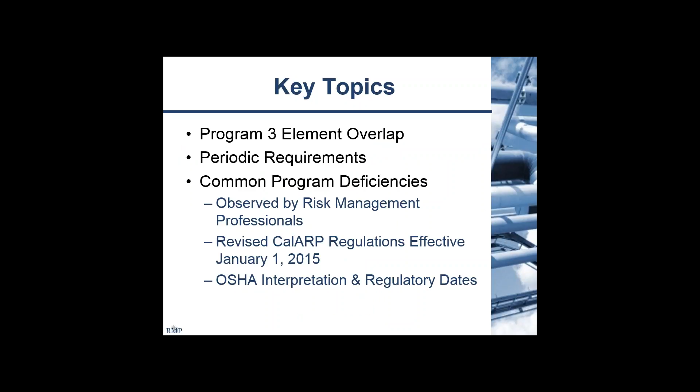Here's the program overlap. It's a nice, easy matrix. You can see while we have 4 different types of regulations, almost everything is across the board. You have the same sort of elements, especially at the program 3 level.

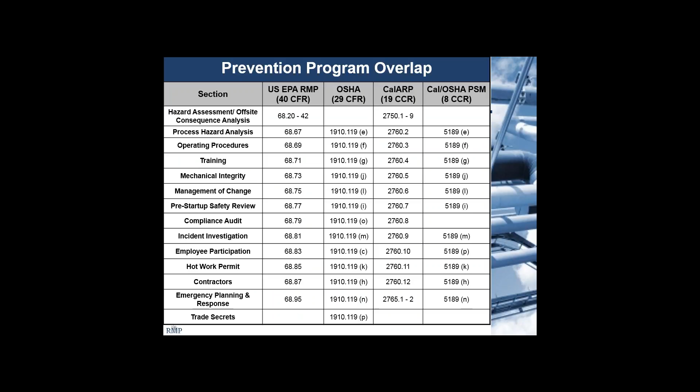Your periodic requirements: obviously you have annual reviews and updates on operating procedures. I'll talk quite a bit about that, but that's one of the biggest ones I always see is very rarely are you getting that annual recertification and revalidation on your operating procedures, as well as your emergency plan. Triennially, you always have refresher training. You can do it more frequently, but at least every 3 years, and as well as that triennial compliance audit.

Every 5 years, you have your CalARP or RMP submittal. You have to redo as part of that your hazard assessment or offsite consequence analysis and your PHA. In California, depending on where your facility is at, there are varying requirements on your seismic assessment. Talk to your CUPA about that, but as a rule of thumb, this is going in with that as well as other external event analysis.

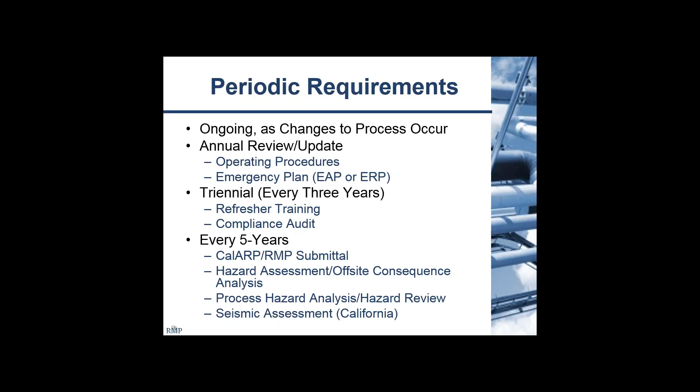Common program deficiencies. These are things our company has noted while doing compliance auditing as well as other program upkeep elements, and also things we kind of noticed. As you guys know, January 1st, they rolled out a new revision of the CalARP regulations. The changes are subtle, but they are things that can pretty easily trip people up. So we'll also go ahead and denote those where it's applicable.

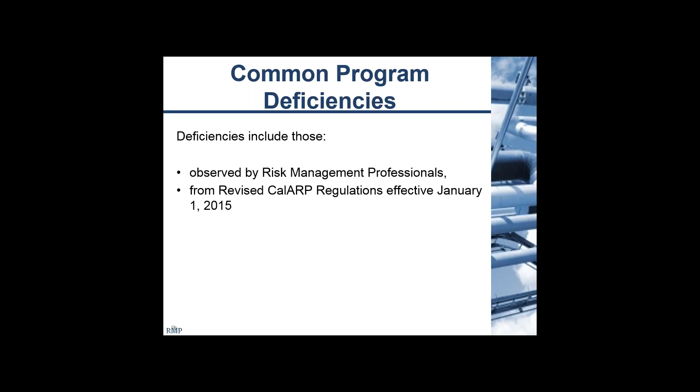With regards to your submittal, obviously the biggest deficiency you can have is not getting it completed and submitted within your timely manner. Another one, this is a little bit less straightforward, but not having a management system in place. If you read this, you have to have an org chart, responsibilities, not just saying, hey, there's somebody up here. If he's delineating responsibility, make sure that you note that where it's applicable.

A lot of times, especially in a larger company, you might have your general manager or someone like that at the top of the org chart. They'll have the overall responsibility, but maybe your maintenance manager is going ahead and taking care of mechanical integrity in some elements. When you guys are doing things like that, make sure those are clearly noted. It helps regulators understand how you're going to upkeep your program. It also helps from an organizational standpoint because everyone knows what they're responsible for, not just assuming it's probably someone's responsibility without clear delineation.

Another one, it's less common, but when it does happen it's often not taken care of: making sure you're updating your contact information or ownership. Say your safety manager or general manager leaves, and he was the emergency contact. A lot of times that's not caught until you're redoing your CalARP submittal. It needs to be changed as soon as possible. Also, these changes of ownership, it's important to note that it doesn't restart your 5-year cycle. Unless you're completely re-registering, it's not going to affect your dates or anything like that.

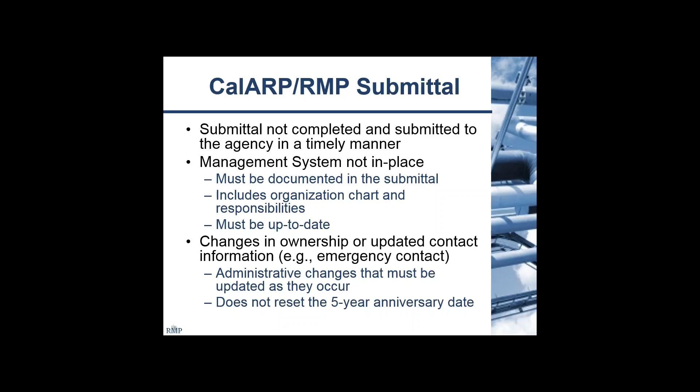From a hazard assessment standpoint, a description of your alternative release scenario is not available. This is the biggest one I've ever noticed. You'll see, 15 pounds over 60 minutes. Well, how did you get to that 15 pounds? What was this credible alternative release scenario for you?

Was it a valve packing leak? Did you have a loading hose failure? Where did you guys get this number from? And how did you arrive at your quantity release? That's one of the biggest ones we notice. Also, not picking your worst case or alternative release scenarios per the regulation. I've seen a lot of times where people just pick an arbitrary number that is pretty close to maybe an alternative release, but they're not documenting, once again, what that description of that thing was available.

Revalidation of it. This is another one. Failure to update the population count.

The software is given, it's freeware, you can very easily get a hold of it. But a lot of people think that because we haven't changed our inventory, that hasn't changed our offsite consequence analysis. While it may not have changed your endpoints, your population has changed around you in 5-10 years.

So you need to be making sure that you're going ahead and modeling that every time you do that hazard assessment. It's the same thing with sensitive receptors. Maybe some of the businesses around you have opened or closed, so make sure you have that, as well as the CalARP submittal, making sure you have the correct contact information, the correct names, and everything like that. It just helps with the emergency response if anything were to happen.

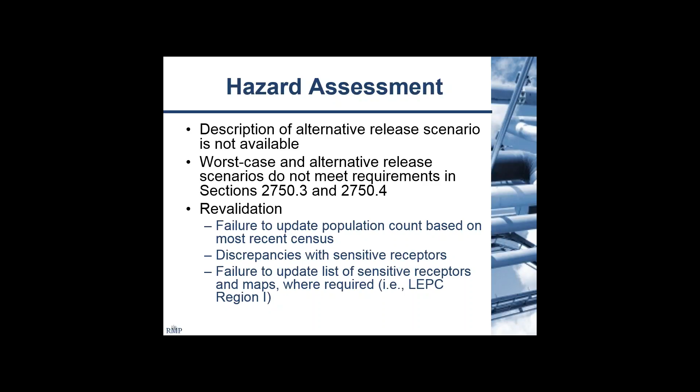PSI, one of the main ones, is not having your P&IDs. Either you might have had them when you initially built the system, but you've modified it since, and those P&IDs aren't indicative of the system you have in place right now. Also, a lot of times they're just missing, or you're missing a page or two. They got pulled out of the binder to make a copy, and they never made it back in there.

Lacking documentation - one of the main and most common ones I see is lacking a relief system design basis. This is a very important one. Basically, it's very important you have those relief systems. However, if you don't have a document that says, okay, this was the basis we chose and this is why we're comfortable with this size PSV, you can't really rely on it functioning properly.

Compliance with RAGAGEP - I'll touch base a little more on this, but this is kind of a hot button for Fed OSHA. They released an interpretation letter in July talking about how you can document this. So this is something they're starting to look a little more in depth at, making sure you're documenting that you're in line with recognized and generally accepted good engineering practices.

Electrical area classifications and distribution systems - oftentimes this is missing. Chemical reactivity and corrosivity hazards - a lot of times this is covered in your MSDS sheet. You can call it out explicitly, but if you don't have your MSDS sheets or it's incomplete, a lot of times you'll see that. And codes and standards used during design.

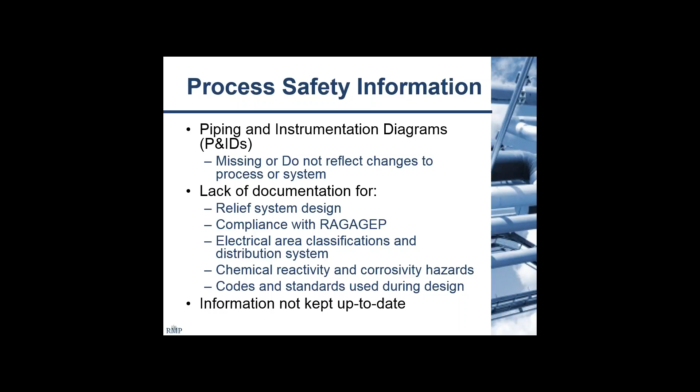And information not kept up to date - this is the same sort of thing I was talking about with the P&IDs. When you're changing that system, you need to be changing your PSI.

Process hazard analysis - one of the main ones I notice, and this is a pretty minor one, is PHA not conducted by knowledgeable personnel in engineering and operations. This kind of goes two ways.

One, your team - as a facilitator, you're there to guide the discussion and make sure the methodology is used correctly. You can apply some technology, things you've seen in other places, some of your technical expertise, but you really need those day-to-day operators and the engineer who's been at that plant for years, who has that innate knowledge of that particular system, to tell you exactly what you're looking at.

Also, on the other side, you might have a great team, but if you don't have somebody familiar with the methodology, you can run into just as many issues, because you don't have somebody following the rules or documenting things properly.

With that, PHA team not being documented is a big deficiency I see a lot of times. They'll just print out the worksheets and put them in the book. The reason that's a problem is if you don't have that PHA team documented, you don't really know the expertise they're bringing. Did you have an operator with 15 years of experience or 3 months? Did you have an engineer? Did you have all your bases covered?

Other discussions don't get documented sometimes - people do the HAZOP or the what-if checklist very in-depth, but a lot of times they'll skimp or ignore human factors, facility siting, external events, or previous incidents especially. Another inconsistency problem would be your risk ranking.

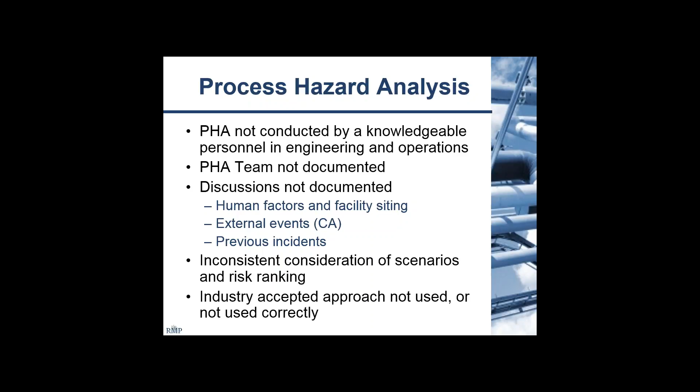This is in red for a reason, but recommendations not closed in a timely manner. Timely manner was the wording that's been used for years. As part of that January 1st update, you now have these conditions. Essentially, you have to have it done within 2.5 years of the PHA, unless you agree upon something, say it's a very big, extensive, large capital project.

You can talk with your CUPA, go ahead, and a lot of times they'll be willing to work with you as long as you're upfront and letting them know this is something we're going to do, but it's going to cost some money. We need to work this into a long-term budget.

Lacking documentation for closed recommendations. This is probably the biggest thing I notice when I do compliance audits. Even if you're documenting it, a lot of times that action tracking log, whatever you're using, you keep it blank, and if it isn't kept blank, they'll just say closed. No dates, no signature. You don't know who closed it, when they closed it, what they did to close it. Obviously that's kind of against the spirit of what the recommendation is there for.

Did you guys just decide not to action it? Why not? Or did you do an alternative thing? If so, what was it? Why did you feel like that was most important?

And also now you need to keep these for the life of the process. That's another change that happened during the January 1st amendments. And the 5-year update now completed by the anniversary. This kind of ties in a lot with anything regarding your dates.

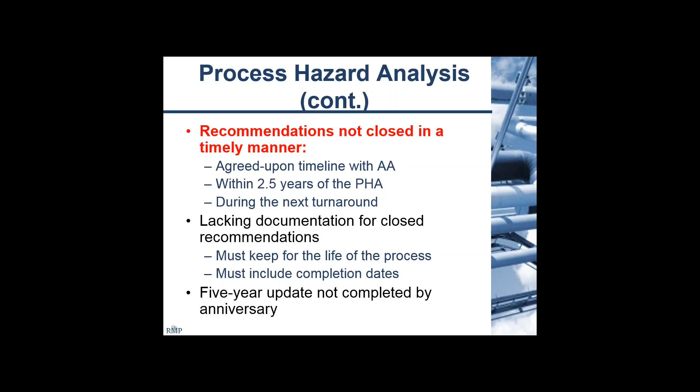Operating procedures. I touched on it earlier, but this is probably the biggest one I noticed, that the annual review is not performed. More times than not during compliance auditing and program review, they aren't being updated, or at least you're not doing some sort of review when you bring operations and plant management together and go, okay, are we still operating the system as we did? Did we change anything? Do we need to do updates? It's a pretty straightforward process, but it's very easy to overlook.

Written procedures not synchronized with operator actions. This is another one. A lot of times your safety manager or an engineer will write the operating procedure, and there will be workarounds that everyone on the ops side just knows to do. Obviously that defeats the purpose of the operating procedure if you are normally operating the system differently than it's intended, because the idea is that you can pick up this piece of paper, read through it, and go ahead and operate the system safely.

Also, each phase of operation is not listed. A lot of times people have their normal startup, normal operating procedures, normal shutdown. And a lot of times this isn't radically different from, say, an emergency shutdown, startup after an emergency, or some of your temporary operations. But you need to at least make sure that you're documenting that, and if there are those nuanced changes, instead of just attributing that to operator knowledge and assuming they know what to do, make sure you place whatever information they need up front, and then you can even just reference back to that normal startup or normal shutdown.

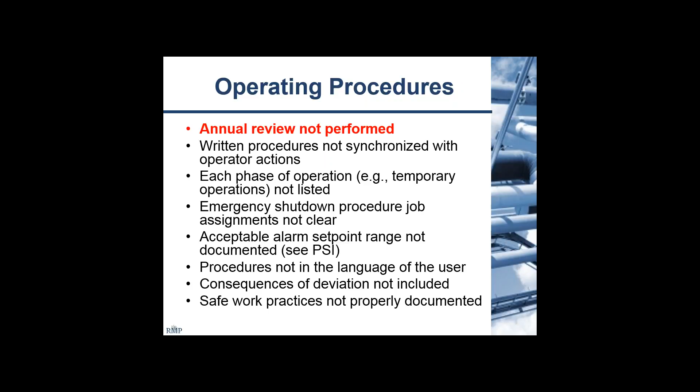Training - documentation of training is not on file. It sounds pretty straightforward, but it's very, very common. The more employees you have, the more difficult it is to track that down and make sure that not just that you're saying, yeah, the training happened, but making sure employee A did this on December 6th, and that everything is closed out and you have the certifications needed.

Another one - a lot of times they focus on safety hazards and operating procedures, but that often does not include maintenance tasks, especially in places that often use contractors. You need to make sure those things are being documented.

Records do not verify operators' understanding of the procedures. A lot of times you'll put canned wording in there that says, oh yeah, we trained them, they know what they're doing. Periodically you need to be testing, making sure that, yeah, these are being operated - not just that the system is working like it's supposed to, but that they're operating the system in line with how you expect them to. If there's a break between how ops does it and engineering thinks you do it, that gap needs to be bridged, because that's allowing gray area where you could end up with issues.

And once again, training not in the language of the user.

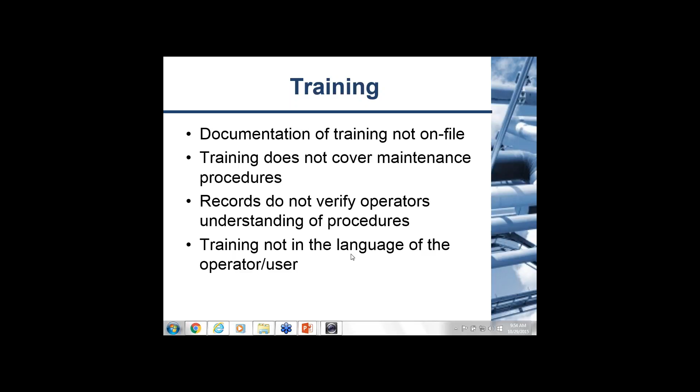Mechanical integrity - a lot of times this is contracted out or done by different departments, but making sure your written procedures are available is key. A lot of times I'll see that, no, we do our maintenance, here's our work orders, but it's not documented anywhere in some nice central location.

Another big one being piping. Paul touched on it earlier, but incorrect maintenance and testing on an arm off the crude unit at Chevron Richmond was one of the big deciding factors that broke that pipe open. It was not being tested correctly. You need to be making sure that piping is tested as well - that can be a major release point.

Your frequency isn't consistent with industry standards. Make sure you're looking at your O&M manuals, things like that, and making sure that what you think is an appropriate maintenance schedule is in line with what these other people provide for you.

And equipment deficiencies not corrected in a safe or timely manner. You do your daily log sheet, you sign it out, everything's looking good, but you notice a little bit of leaking or, let's say, some ice buildup on a line. It's not supposed to be there. You write it down, you put it in the daily log, you go home.

Making sure that's not only being handed off to the correct personnel, but that management or whomever is in charge of taking that to the next level is following up on it and closing it out. You're noting that as an unsafe condition for a reason - you don't want to just rely on it to get done whenever it gets done.

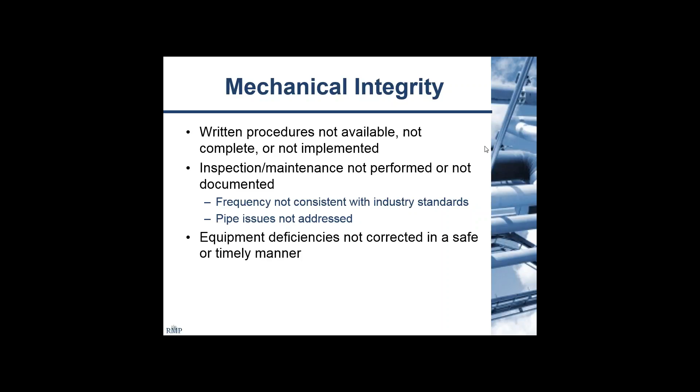Not documenting your preventative maintenance schedule with the contractor - a lot of times facilities just say, hey, this is a knowledgeable contractor, he knows what he's doing, he comes out, he sends us the bill. Make sure you guys are scheduling that: this is what our contractor is coming out to do on a 6-month frequency, a 1-month frequency. We know exactly what it's doing, and his write-up at the end of the day reflects that we completed task A, B, C, D.

Quality assurance plan not in place. This sort of ties back into that verification process, making sure that not only you're doing these things, but that it's actually being done correctly.

Sufficient information not available for piping and equipment to understand the hazards and develop a maintenance program. With the older system, a lot of times documents will get lost. They maybe got thrown away 10, 15, 20 years ago, and you guys have been operating it blind or something of that nature.

If that's the case, work with the contractor, work with the manufacturer, things like that. Make sure that you're not just assuming that this is the best, because that's kind of general. Each piece of equipment is different. They might have a more stringent frequency on certain things because of the way that system is built, even though it might be different, say a screw compressor versus reciprocating.

With that, like I said, the main thing I would say to take away from that: make sure your mechanical integrity is robust. You're not just doing your PSVs, you're doing your pumps, but make sure you've got your vessels, you've got everything, as well as piping.

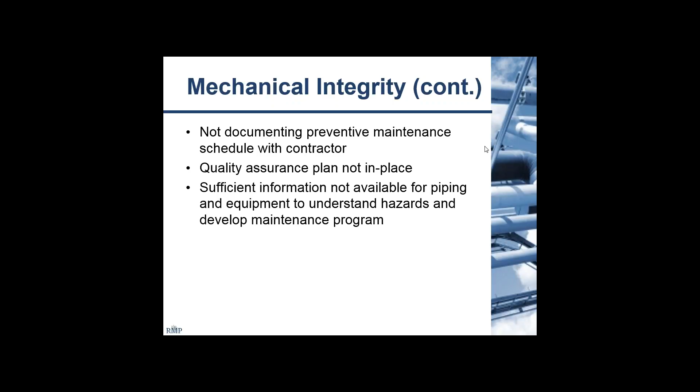Management of change. The first one is kind of a no-brainer deficiency: the procedure not being used. That can be met in a couple different ways. Either you're ignoring the procedure completely, or it's not being followed up as it's supposed to.

If you're going ahead and doing this change, make sure that you're not just leaving it and going, okay, we're initiating the change, and that piece of paper sits on somebody's desk. A lot of times that's the big one I see: the MOC was initiated, but it was never followed up on.

You never got the signatures, and especially you never closed the thing out, especially if recommendations came out of it. You're noting those as issues that need to be resolved before you start the system back up. I'll touch a little bit more on that in PSSR. But that's the biggest thing I notice—a lot of times that follow-up isn't done. The MOC procedure is being done more as a paperwork exercise rather than an actual safety system.

The prevention program documentation is not updated to reflect the changes. This is similar in vein to what I was talking about with the recommendation. It's very easy to go ahead when you're doing the MOC.

You know exactly what you're doing, it's right on your mind. Go ahead and update the entire prevention program while you're doing that, rather than 5 years or 3 years down the road during your compliance audit, noting deficiencies and trying to track down paperwork and issues then.

Personnel not adequately notified of the change. As part of all of these regulations, you need to be making sure that you're talking to your contractors, your affected employees, and they know that you're changing the system.

The need for modifications to existing operating and maintenance procedures, or whether new procedures are needed, is not assessed. It kind of talks back to that updated reflecting changes. If you're changing equipment, that might change your set points, your operating parameters.

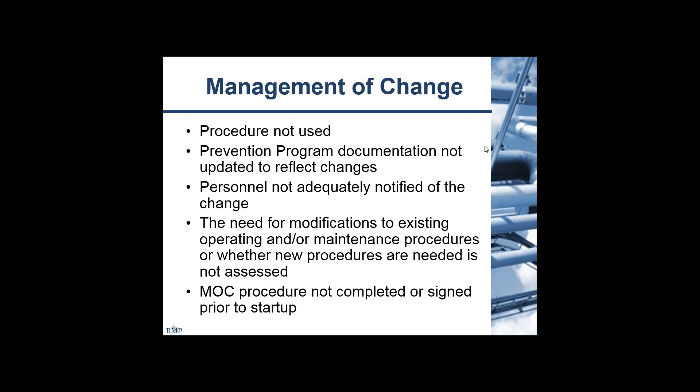If you're not updating your operating procedures, say if somebody goes, well, I'm not really sure about this, grabs the operating procedure and says, okay, this is the set point. If you haven't changed or updated anything, that could potentially end up in a hazard or at least some issues with the system. And the MOC procedure not being completed or signed off prior to startup—that's the biggest one. And then this ties back into the pre-startup safety review.

The procedure is not documented. One big problem I see with compliance audits is people don't even do the PSSR, and then after the system's been running for 2 or 3 years already, they'll go ahead and just say, oh yep, we did this, we did that. It's a pre-startup safety review for a reason. You need to be making sure that everything's already been addressed before you start the system up.

If you do it afterwards, that kind of defeats the purpose of that verification and making sure that everything's been taken into account. Documentation not being kept on file or not completed following implementation. It ties right back into that.

PSSR is not documented or conducted independently of the MOC. A lot of procedures I see, you have the MOC, and in that same exact procedure, you have that PSSR form stapled right onto it, and people do it all at once. The idea being that MOC procedure is the bulk work of what you're doing, and then that PSSR is there essentially just to verify that the MOC procedure was done correctly, everything that needed to be done was addressed, and then you go ahead and say, yeah, we're comfortable starting the system back up.

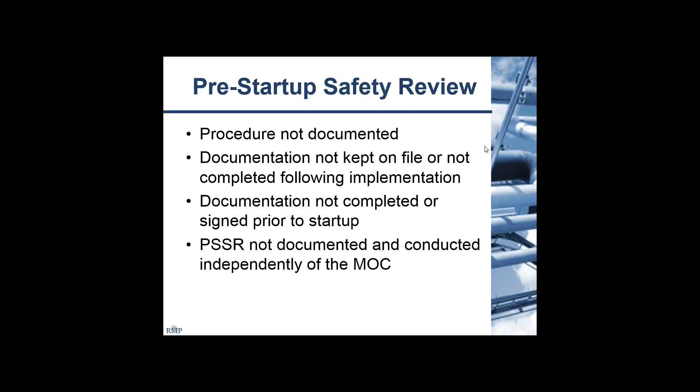Compliance auditing, once again, recommendations are not corrected or completed in a timely manner. The timely manner has been phased out. You have 1.5 years from the audit, or if you need longer time, talking with your AA.

And the compliance audit not completed by anniversary date. Everyone's oftentimes very focused on their 5-year, that big update, that 3-year compliance audit a lot of times slips by the wayside. Maybe you get it done at 3.5, 4 years, or maybe it just completely falls off track.

While I do see that it's very easy to lose that side of that, it is very important to make sure that you've got it auditing and keeping up and making sure that everything that's being changed, you're verifying and making sure that it's already been done. It's a lot easier to catch it on a 3-year cycle than if you're doing it every 5 or 6 years, especially if the MOC procedures and things like that aren't being followed as stringently as they need to be.

No documentation regarding the audit scope, methods used, or findings. It's a very minor thing, but it's very often overlooked. People are very concerned about documenting everything that they see or don't see, but they don't say how are we doing this, who's doing it, why are we doing it.

Also not involving the correct personnel. You can't just sit there, grab the RMP binder and set it down on your desk and flip through it and say, okay, yeah, we've got wording that covers every one of our bases. Make sure that you're pulling operations, maintenance, plant management, and then verifying some of these things.

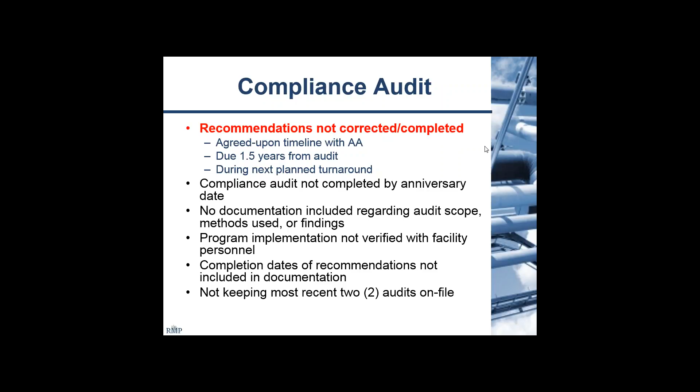Incident investigation. Once again, I think you're starting to probably pick up on the plan of what I'm going to come to later, but no follow through on recommendations. Just like the compliance audit, you have 1.5 years following the investigation to close the recommendation, or 2 years after the date of the incident, whichever one is earlier. If it's a long lead item, you can work with your AA. They understand if it's going to be a large capital, but make sure that you've also put something in the interim together to mitigate that risk until you can make that major upgrade.

Another one being incident investigation not initiated within 48 hours of the event. That's very often missed, especially if it happens to the end of the week, things like that. Make sure that you guys are launching that and getting the ball rolling as quickly as possible while the memories and everything is still fresh.

Required information not documented during the investigation or in report. A lot of times, you'll have a very short incident investigation report. Make sure that you're putting in the adequate amount of information instead of just filling in the bare bones minimum. The more you can put in there and understand what exactly happened, the better it's going to help everyone, especially if you're a large company and you might share it across the board or across the fleet, saying, hey, look, this is something we saw here. Make sure you look for this there.

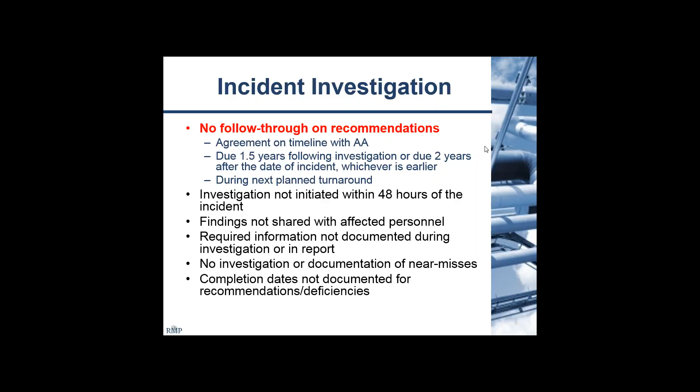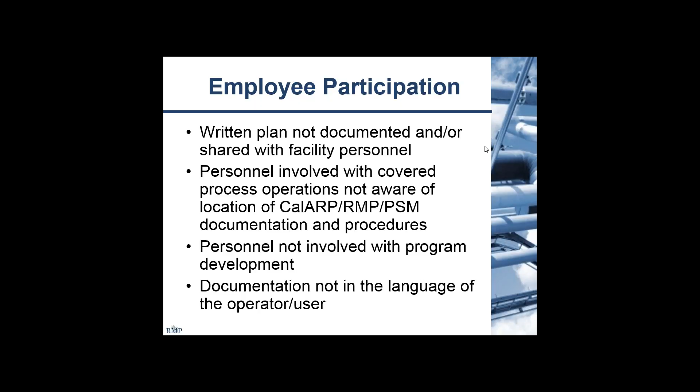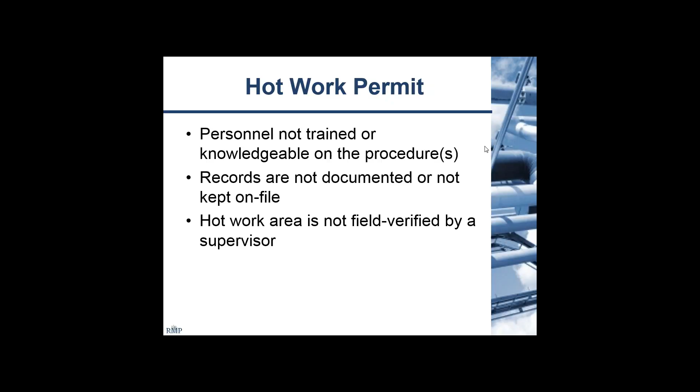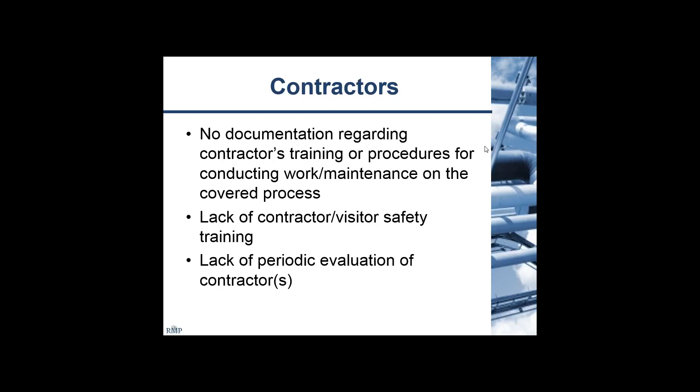And lack of periodic evaluation of contractors. A lot of contractors have been there for a long time - maybe that contract owner has been there a long time, but they bring new people in and out. Making sure you're periodically evaluating - it's once again just oversight. People can get complacent with a lot of procedures and plans, so making sure you're going ahead and verifying that they're doing everything like they're supposed to.

Fire departments, they like being involved with this. They like to know exactly how you're going to be responding, what's on site. Obviously, it helps them with their response. It helps keep your guys safe, keeps their guys safe, everyone wins. So make sure it's at least been documented. Ideally, if they can come out and do some training or at least take a look at the facility and know what your layout is like.

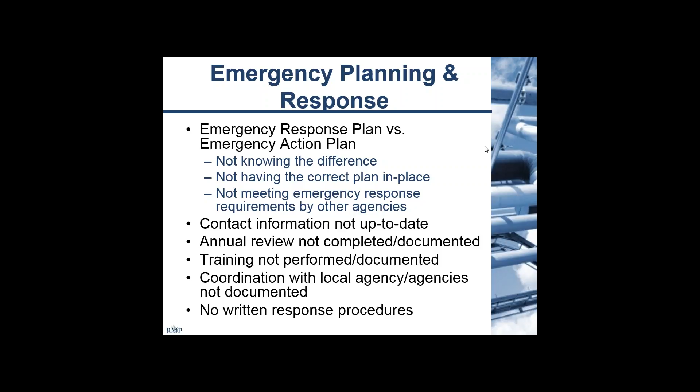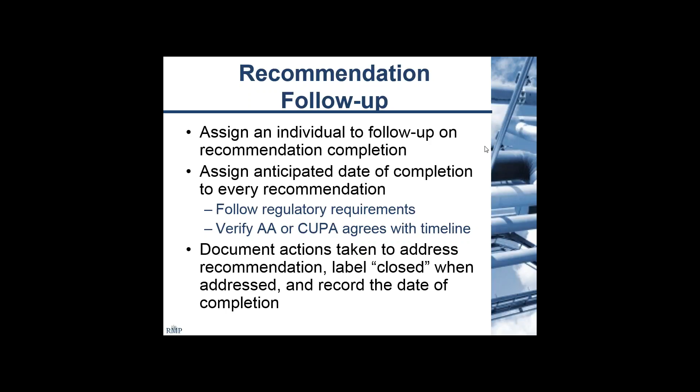And like I said earlier too, document your actions. Just saying closed leaves it too open-ended. I can never tell what was done, and that way it's kind of defeating the purpose of that recommendation. You don't know what was done. Was it the actual recommendation? Did you do it as it was stated? Did you come up with a different idea that made more sense? It was safer, but why? Or you didn't action it, why did you not action it? And then also include the date and who was responsible for that decision.

It kind of comes back to this basic fundamental principle: if you're not documenting it, it's a deficiency. Pinky promising that you did it correctly or anything of that nature, it's really not proving anything.

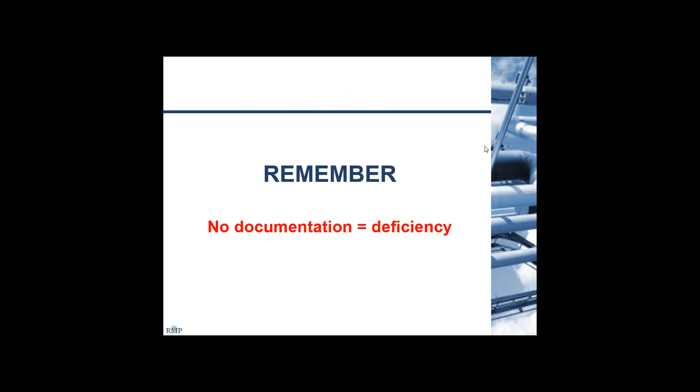These are kind of things I had alluded to a little bit earlier, but from a regulatory update side of things, OSHA has released 3.5, we'll say, interpretation letters directly involving PSM. RAGAGEP enforcement, recognized and generally accepted good engineering practices. That's the first one I had talked about. Basically, they're just showing you, everyone says that they're doing this the correct way. There's usually a sentence on your PSI that says this is being designed, operated, and maintained in line with industry best practices. But that's it. Make sure that you're actually documenting, no, this is what we're doing to maintain this piece of equipment. This is how we're complying with that.

Retail exemption - this has got a lot of people paying a lot of attention right now because this has kind of gone back and forth a lot of times when it comes to regulation. They've released several different interpretations on what retail is. Now they've gone ahead and released a letter of enforcement basically saying that if you don't have that NAICS code of 44 or 45, you're not eligible for that exemption. That especially applies to, say, fertilizer companies. Fertilizer companies, since they've been taking anhydrous, aqueous, and going ahead and making that, and then they're not the end user, the farmer is, they've oftentimes taken that retail exemption. OSHA's closing that.

Enforcement, this is where the half the letter comes from. They initially were going to go January 2016, but I think they've gotten a lot of pushback and a lot of people aren't quite prepared yet. So they went ahead and gave it another 6 months.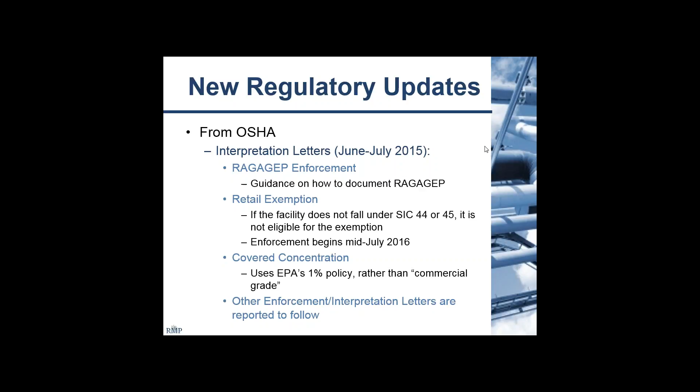From California, Senate Bill 612 is in the pipeline. CUPAs now have a general duty clause if that one rolls out as intended. This is in line with EPA RMP, which is obviously the basis for the CalARP regulation. It gives them the ability to say, hey, this is something I've noticed - I don't think it's deficient, but I think you can improve the system very easily by doing this. It also requires different things regarding mapping, underground and above ground storage tanks, spill prevention and countermeasures, and hazardous waste.

I attached the link to that Senate bill as it stands right now. You guys can download the presentations - Kim talked about that earlier. If you want the link, talk to me and I can email it to you.

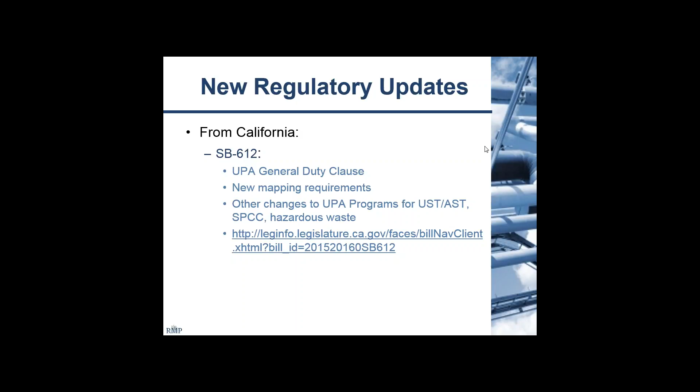Status and what to expect: CalARP already rolled out the new amendments. We've been talking about those a little bit with the nuanced details. As of January 1st, 2015, those are in effect, and they are being enforced as they stand.

Program 4, this is for the refinery sector - it's the PSM for refineries kind of thing. It's due in mid-2016. They're working pretty hard on it, and Paul Penn and a couple of the other guys have been very actively involved in that.

CalOSHA has the exact same thing. They're calling it 5189.1, just adding a 0.1 to their PSM standard, and it's going to be rolling out almost the exact same time. They're developing these in tandem, and there's a lot of overlap between the two.

US EPA is supposed to be getting the proposed rulemaking out soon. Initially what I'd read was September 2015. It hasn't been released yet though, so keep an eye out - it should be coming up pretty soon.

And FedOSHA, I talked about that with the enforcement letters, but they're looking at the Small Business Regulatory Enforcement Act - their SBREFA - and they did that in June. They haven't really released any updates since then, but it's very much a priority item.

Dan talked about Executive Order 13650 - that's what spurred a lot of this. So they're under a lot of pressure from the Senate as well. They've had several hearings where they've really gotten beaten up because they haven't gotten these things out as quickly as they would have wanted.

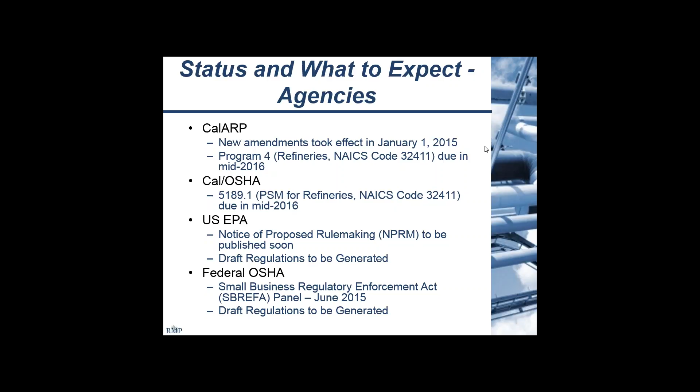And then I just put some general references and other things on there. Like I said, you can take a look at those at a later date.